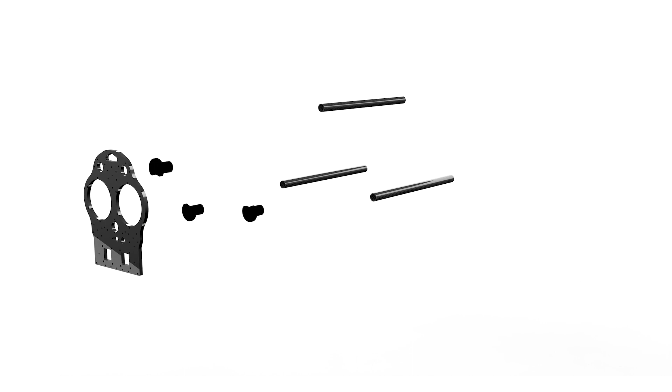My name is Andrina Grimm. I'm a bachelor's student in mechanical engineering at ETH Zurich, and I'm responsible for the mechanical team in Project Diana. Project Diana is an ETH Zurich project which started last autumn. It is a robotics project. We work in the fields of animatronics, where we fuse animation and robotics together.

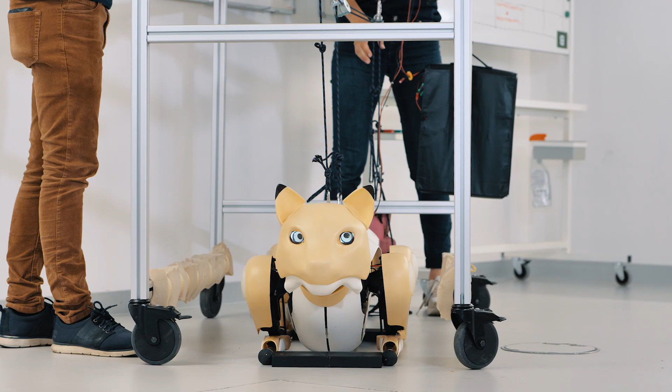So the goal is to create a character, which, as you can see, is a character that moves on its own, which is still in progress. And this is also why the project is not finished yet. I worked on the implementation of the shell, which are all the aesthetic parts around, how to attach them to the robot and manufacture them.

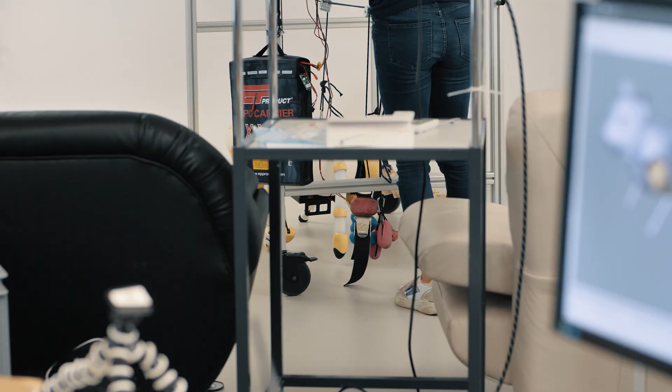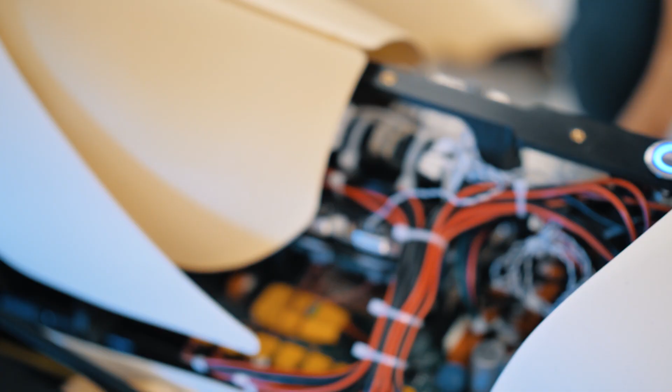We use 3D printing for its design freedom. You can take any interfaces from one hole to the other and you can connect them in a nice way, not only in a straight line, but also curves, adding a character and a feeling to the whole body. We are using 3 different kinds of 3D printing materials. The first one is the multi-jet fusion. We have also PLA, and we use selective laser sintering, SLS, for our shell.

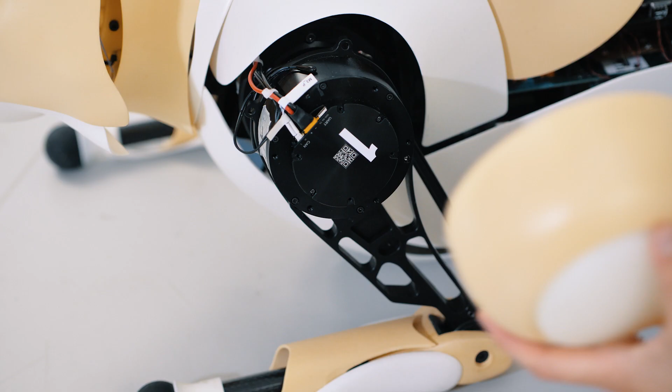So we use the Sintratec technology for our thighs. These parts have a high risk of breaking if Diana falls over, and that's why we also have a second batch, so we can exchange parts quickly. We used PA12 as material, and we got a lot of design freedom, as you can see. We get curves, and we can also create our mechanical interfaces with clear lines and surfaces, which are very helpful to mount the part.

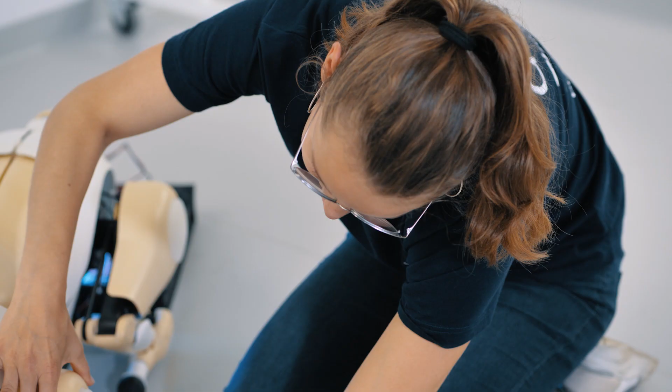We didn't need to sand off the surfaces because we already had nice surfaces, and then we could add on the color and the layers with the lacquer, which was hard to do with the multi-jet fusion parts. So that is a clear advantage of using this kind of material.

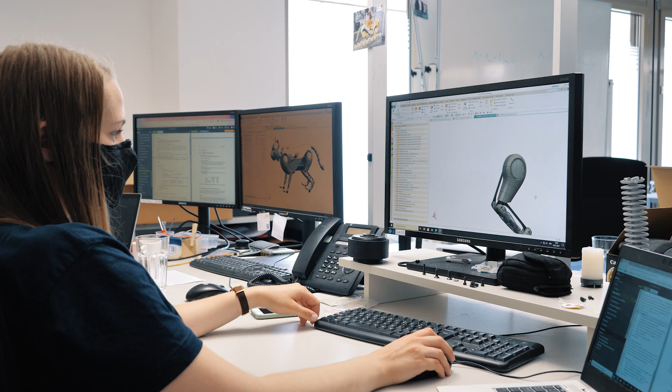In our project, we showed that it is possible to use 3D printing as a shell for a robot, which has not been done before. Before, thermoplast has been used. And with 3D printing, we still have sturdy parts, but that are also flexible and that do not break in case of impact.

So there's a huge potential in the design and the whole character, because we want to build characters in the real world, and we create a system where you can add different characters and have different emotions shown on a robot. And we're very happy about what we achieved in 9 months and excited about where we're going to be in a year or more.